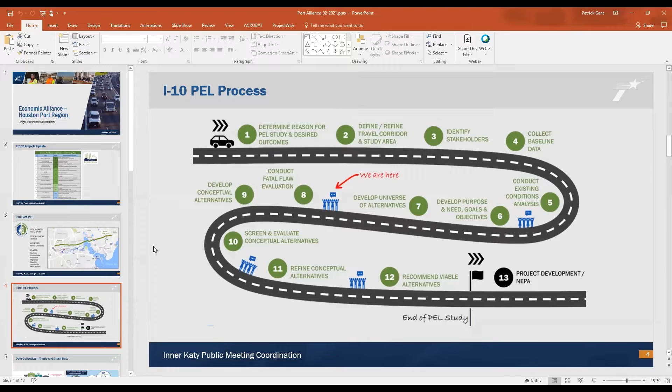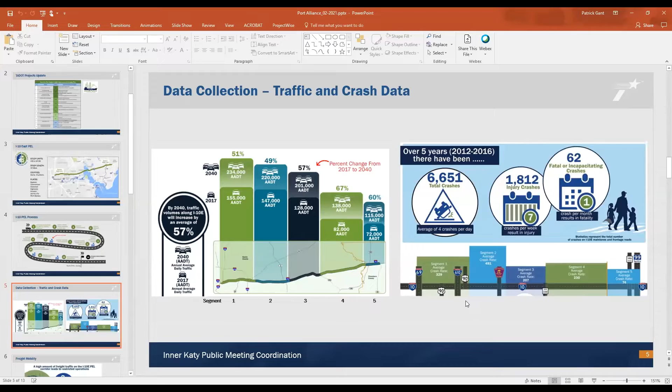Diving into more granular data, we found that the segment between 610 and just a little bit east of the Beltway experiences the heaviest amount of crashes. And the Federal Road interchange itself experiences the most crashes of all. What's going on at Federal? It's kind of a major corridor for trucks accessing the broader port region—they make their way down towards the Washburn Tunnel and access other key facilities important for the region. There's a lot happening there, and there's been a lot of crashes there specifically, so that's going to be a key aspect of what we look at moving forward with this particular PEL.

Freight—I think it's pretty obvious amongst this group, but it's good to reinforce it. Freight along the I-10 corridor is heavy. When we did that broader I-69 origin-destination study for the region, I mentioned that the region generally consumes the vast majority of commodities coming in, but the exception is really the I-10 corridor. There's a significant amount of traffic going coast to coast, from LA/Long Beach, across I-10, to destinations like Louisiana and Florida. Keeping that in mind, we're finding that truck percentages along the I-10 corridor are somewhere around 13 to 14% of overall volumes on a daily basis—relatively high compared to other facilities in this region.

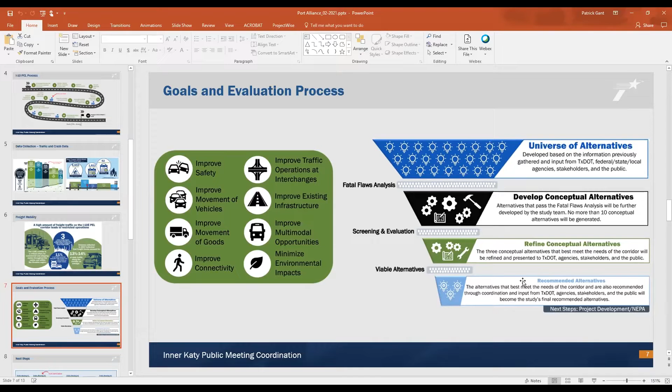Looking at next steps, we've completed phase one, and we're now generating that universe of alternatives for satisfying the goals of the corridor. We plan on holding a public meeting to show what we've done so far and get the public's input on the universe of alternatives in the next couple of months.

There has been a bit of a backlog in TxDOT public meetings, certainly because of the pandemic and the ramifications of dealing with the virtual environment. It's added a lot more work for TxDOT and our consultant community to prepare materials, since essentially everything has to be put into video form. So it's added some time and required development of new systems to get good feedback from the public.

But at any rate, we look forward to having additional public meetings on this PEL shortly, and those public meetings and stakeholder meetings will continue throughout the life of this particular PEL. In terms of study completion, we're hopeful that throughout the rest of 2021 we'll refine those alternatives down from a universe of alternatives to a set of more viable alternatives by the end of the year, so that by 2022 we should arrive at recommended alternatives to move forward with. So let me pause here and take any questions about the I-10 East PEL.

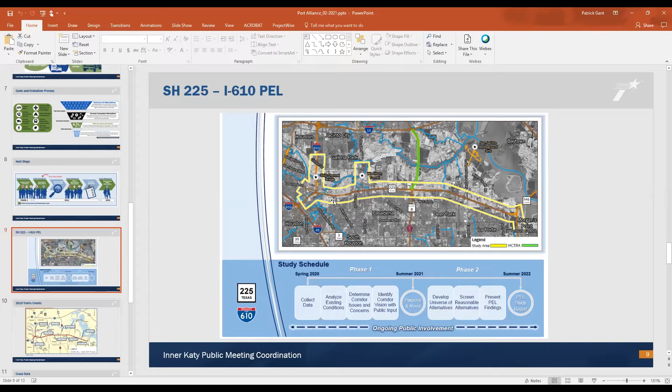225 just really and truly got kicked off last year, so we are a little bit further behind compared to the I-10 East PEL. At this point in time, we're really just kind of in the data collection phase, so let me go through some of the data that we've collected so far.

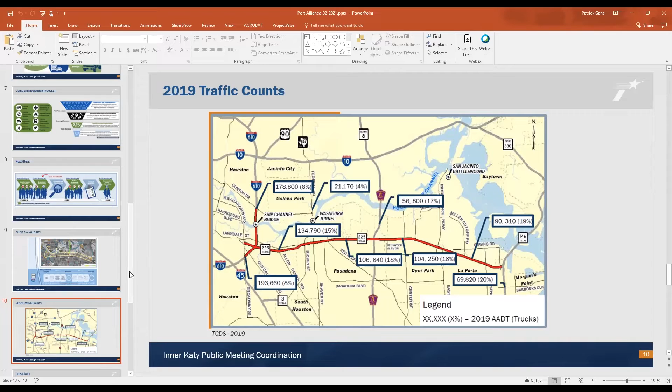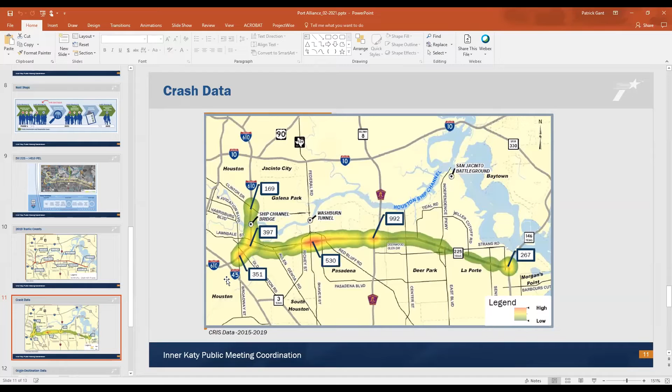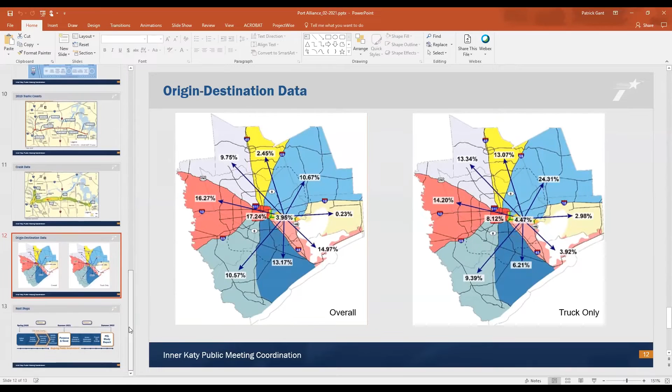So, next steps for the 225 corridor. We're in that early process, the phase 1 portion of the study where we're collecting data. We're going to be holding a public meeting and some additional stakeholder meetings with everyone to gather input on what the general public feels are the needs of the 225 corridor. With that valuable input, we'll be able to move on to developing alternatives that satisfy those needs. We're trying our best to compress the 225 PEL study to coincide with the work going on with I-10, so we're looking at a 2022 timeframe to have a set of viable alternatives to move forward into the generalized NEPA process.

That's the end of my presentation there, Chad. I guess if anyone has any questions, I'll be happy to take them.

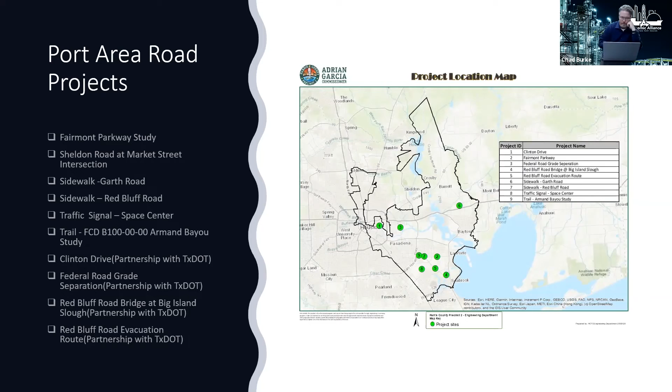Okay, excellent. Any other questions for Milton?

If it's okay, I have a quick question, mostly about the sidewalk and the Armand Bayou trail study. Is it looking to make that trail from the Bayou up Red Bluff Road going towards Fairmont Parkway accessible? Right now it's a soft surface trail, correct? Yes. Is the idea to make that accessible with some kind of hardened surface, or what's the scope of that project? So the scope is to build an 8-foot trail along Armand Bayou and to connect Bliss Meadow Park with the partnership park.

Meadow with, which one, I'm sorry? Partnership Park. Partnership.

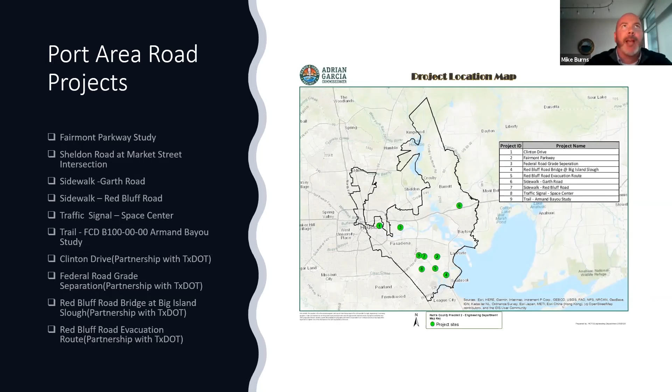And you said there was a sidewalk project as well, but that seems pretty obvious. There's a sidewalk that kind of ends along Red Bluff Road, and we're also looking into the connectivity with different roadways and whatnot. So it's not just the trail along the bayou, we're also looking at the peripheral connectivity as well. Perfect.

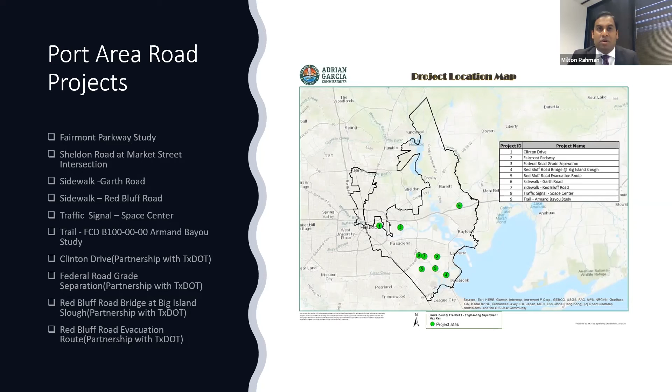All right, if there's no more questions, I'm going to move on to give a little highlight of the drainage projects we have planned for this precinct. One of the big programs we have is the subdivision drainage projects that we are building. We have 24 projects ongoing, and as you can see on the screen, there's a significant amount of projects in the Bay Area or Port area that is ongoing. Majority of them will be constructed within the next 2 years.

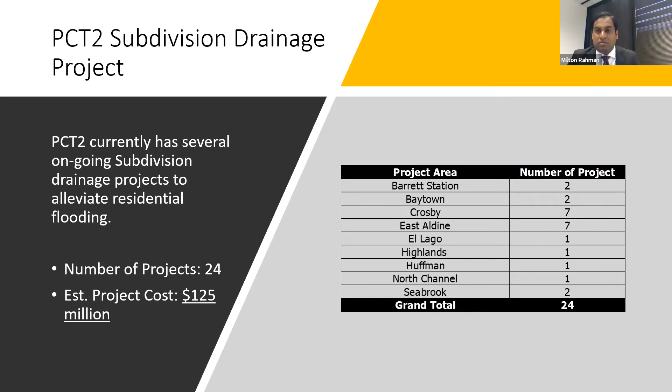From the Harris County Flood Control Bond side, currently there are 20 projects ongoing in entire Precinct 2, valued at 182 million, either located in Precinct 2 or partially located in Precinct 2. Similarly, we have 197 projects valued at $1 billion in different phases at this time with Flood Control, which will be built within the next 7 years. So that's the game plan so far. A lot of this depends on the federal grant applications we have submitted, so we are hoping it all comes through.

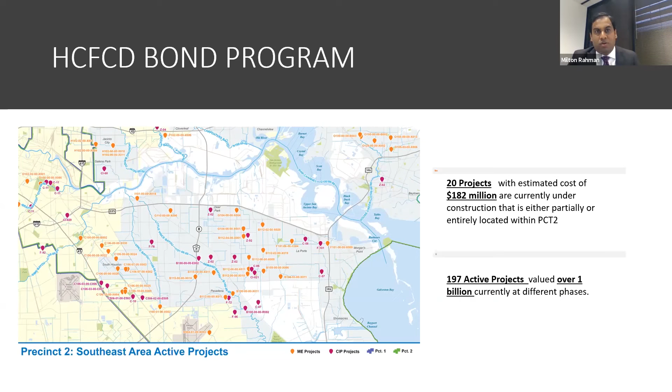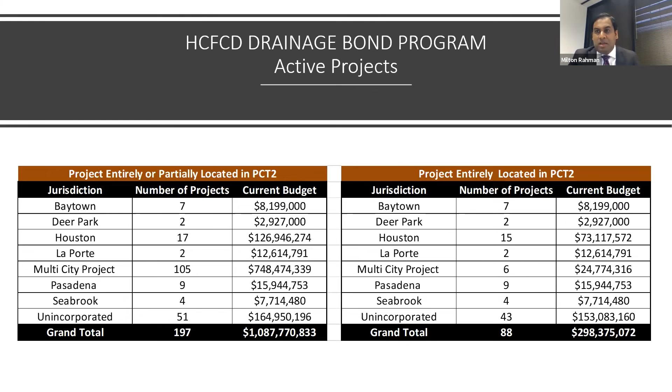This is a quick breakdown for the projects we have. Again, we have 197 projects that are either partially or entirely located in Precinct 2, and again a significant amount of these projects are in the Bay Area and Port region. So with that, I'll close and open for any questions y'all may have.

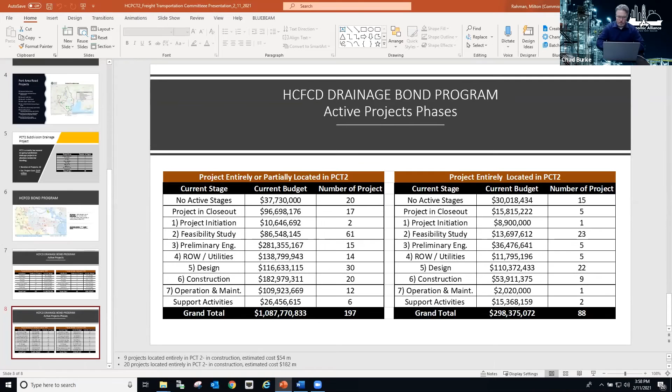Just a second, anybody chime in if they've got questions for Milton? All right, hearing none, I think, Milton, we'll say thank you again.

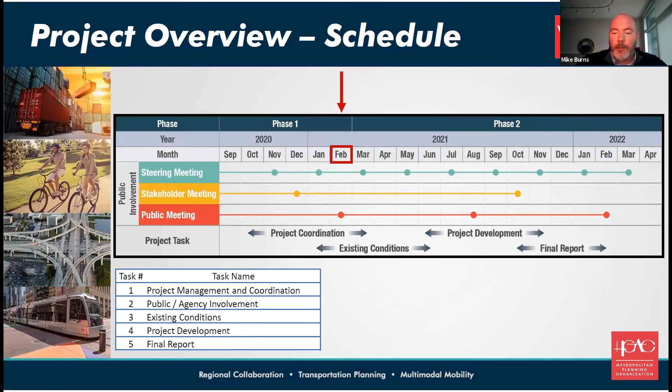As the name suggests, the study is in the southeast portion of Harris County and includes portions of the cities of Houston, South Houston, Pasadena, Deer Park, and LaPorte. During phase one of the study, there has been coordination with the steering committee members to finalize vision and measurable goals.

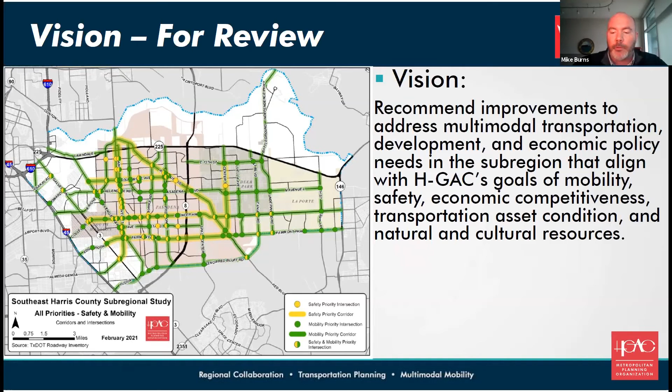The safety goal aligns with Harris County's and City of Houston's Vision Zero policy to improve areas with existing trends of high injury and fatalities, to help prevent those in the future. Mobility success will be achieved by using context-appropriate complete streets principles to accommodate all users of the transportation system.

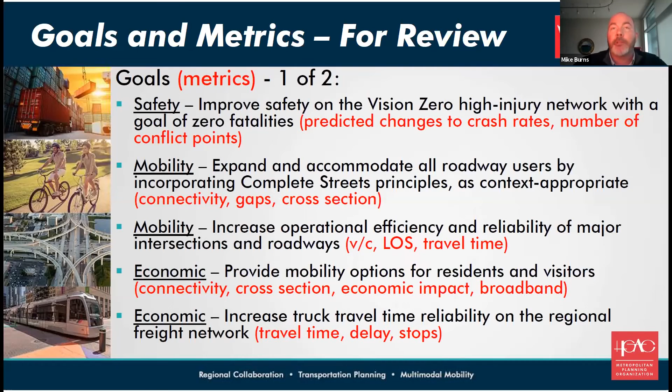To help ensure economic success for the area, recommendations for the priority network would improve facilities' ability to accommodate choices other than driving alone, and improving reliability along the regional freight network.

Maintenance goals are to help achieve a state of good repair and resiliency of assets. Goals to protect resources would improve air quality by reducing emissions and avoid the need for mitigation measures for environmental impacts. These goals and metrics will be used when evaluating and prioritizing transportation improvements within the study area.

Based on available data on road classification, congestion, and safety conditions of major roadways, the consulting team has mapped a priority network. These areas will be the focus of additional analysis and development of alternatives for improving traffic flow, providing mode choice, and reducing the risk that contributes to crashes and serious injuries.

As this map suggests, there's a lot of overlay of high crash locations and highly congested locations. These are primarily along major roadways such as Shaver Street, Red Bluff Road, and the east-west corridors of Spencer Highway and Fairmont Parkway.

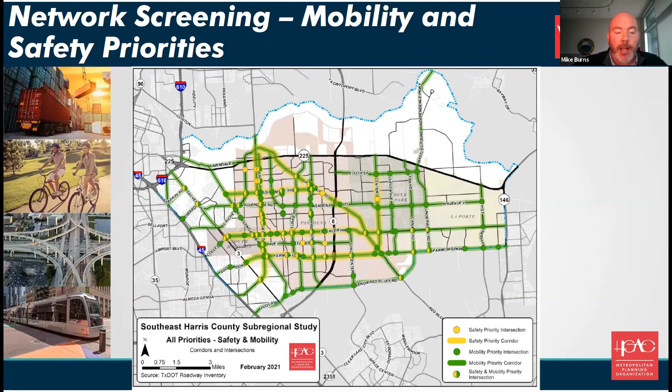As we continue through phase 1 of the study, the vision, measurable goals, and priority network are pretty well developed. Near-term efforts are focused on a public engagement tool that will be rolled out by the end of this month, February, to capture additional early input on existing conditions. A formal public meeting and commenting period will be notified and advertised in March, and we're anticipating a public meeting on March 25th for this study.

Following those efforts, the more interesting phase of project development and evaluation will start early this summer and extend through the end of the year into early next year. The same outreach, coordination, and use of public engagement tools will result in preferred recommendations that may ultimately live in local community capital plans and the region's long-range transportation plan, to potentially use federal and state funding for implementation.